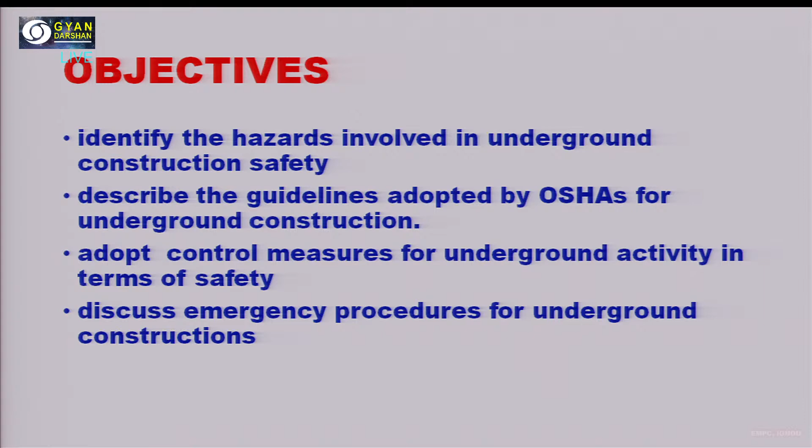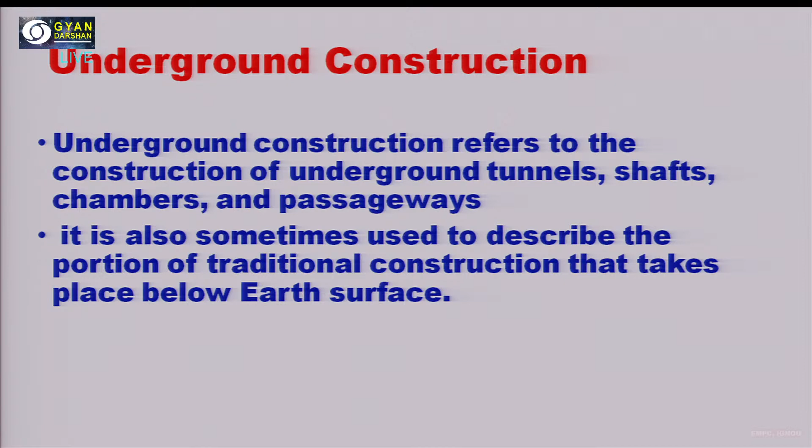So let us first understand what is underground construction or underground works. Underground construction refers to the construction of underground tunnels, shafts, chambers, and passageways. It also sometimes refers to the portion of traditional construction that takes place below earth's surface. Any construction activity or works going on under the surface is referred to as underground works or underground construction works.

Now let us look at some history of when underground works or underground construction works began. Human underground construction activities began with cave dwelling prehistoric people who wanted to expand their homes. This goes back to the prehistoric period when human beings were living in jungles and finding their dwellings, and the easiest dwelling they could find was in natural caves. These caves were small, so they wanted to expand them for their living, and started excavating and cutting them. So these were the first traces of underground activity in human history.

Then all ancient civilizations practiced some form of underground construction. Whatever civilizations existed throughout the world, you will find that some kind of underground construction work happened, with traces found like that.

One important branch of this, you can say as proof, is rock cut architecture. What is rock cut architecture? You might have read in history that in India and throughout the world there are many buildings and constructions which were carved out by cutting the parent rock. No building material was brought to that place; everything was created by cutting the existing rock. These people were doing this construction activity by cutting that rock and entering into it, so this was considered as underground work or underground construction.

And in early urban centers, underground spaces served as burial places. These were used as burial places and to provide protection against invaders. When invaders invaded any place, people created underground spaces for their safety to safeguard themselves from the invaders.

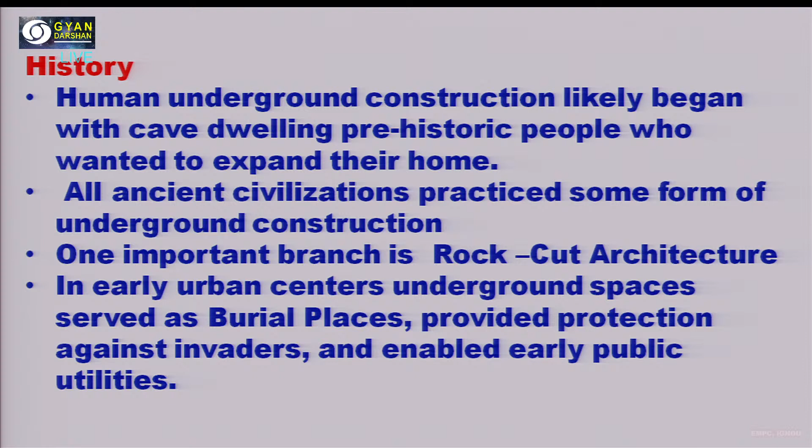Then it enabled early public utilities. Many services and public utilities were also built underground for this purpose. So these are some historic facts about underground works or underground construction.

Now, what happened later was that as urbanization increased, there was a need to find spaces which would not disturb the aesthetics of the existing place and also not make existing facilities congested. So it was thought to put public services or utilities underground, activities like laying cables and making sewerage systems. Many things started going underground, so with urbanization, this underground activity also increased.

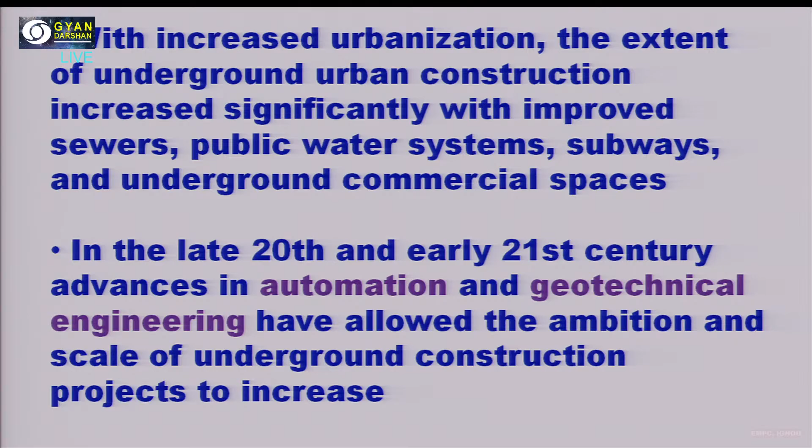Like sewers, public water supply systems, subways, underground commercial spaces. You find nowadays many underground commercial spaces, almost in every market. Then if you travel on the roads, you find many subways there. So these are the activities which increased with increased urbanization.

In the late 20th and early 21st century, advances in automation and geotechnical engineering have allowed the ambition and scale of underground construction projects to increase. There were challenges, problems, and risks involved in underground construction or underground works, but now with new facilities, technologies, and machineries, it has become easier and a bit safer in comparison to the past.

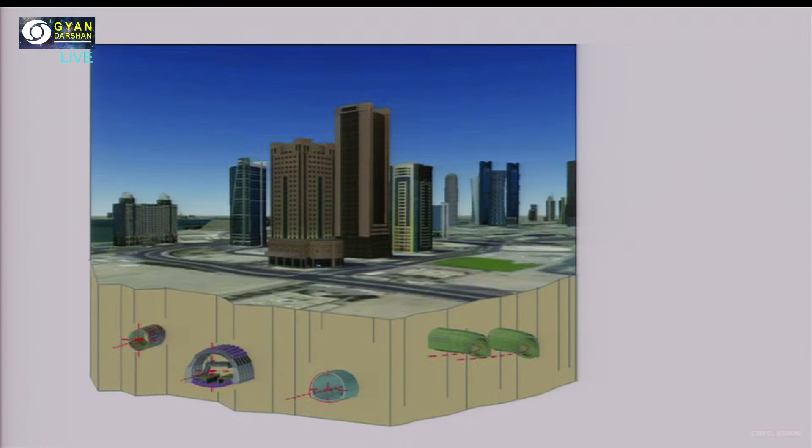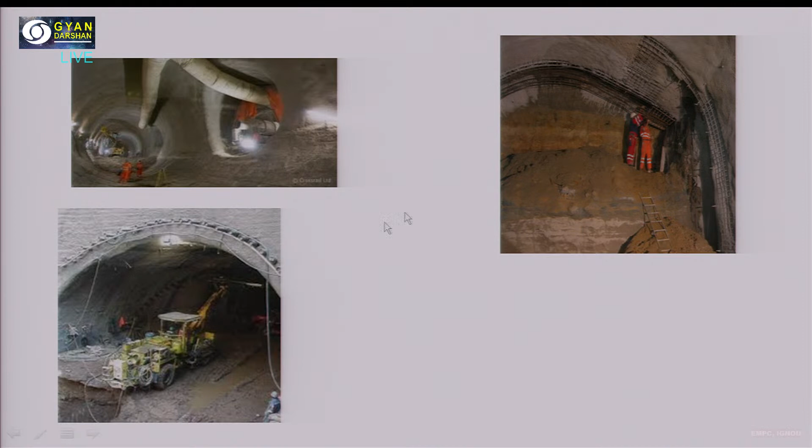These are some of the other graphics which show what type of things the engineers are doing under the earth, basically. You see the tunnels here; all three pictures are related to the tunneling work. This shows how these are done, but these pictures are also giving you a glimpse of the risk associated with these activities.

There are many risks associated with these activities, and two prominent risks are the problem of lighting and ventilation. When working underground, there is no natural light available. Second is ventilation, air is not available. So workers have to work in difficult situations, and these situations may be very risky for the health of the workers. From that point of view, the safety aspects come into the picture.

So this lecture is all about this: what are the risks associated with underground works, and what safety measures we can take to avoid any accident while working underground.

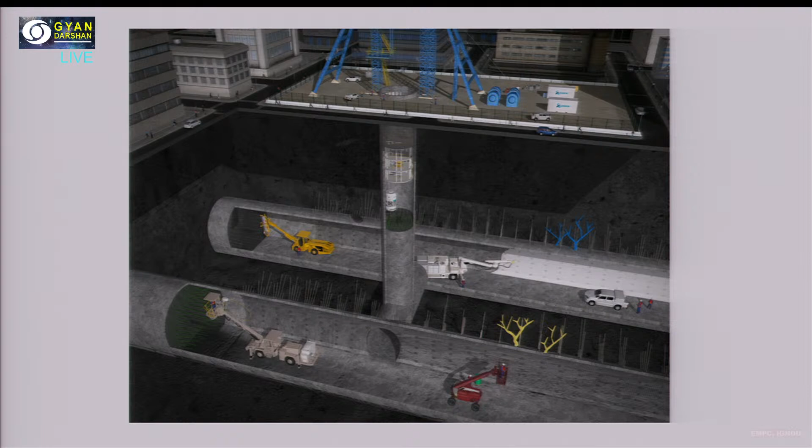You can imagine that these workers are working at a great depth, so there are many risks and hazards associated with this type of work.

So what are the challenges in underground construction? Underground construction has a number of unique risks, mind it, these are risks which are associated with this type of work specifically. In addition, there are challenges which are associated with traditional construction and mining also. So there are two types of things: risks associated with traditional construction and mining, and additional risks which are unique to this type of work.

Underground construction workers often work under reduced light conditions because there is no natural light available there; we have to make arrangements for lighting. Then these spaces are very dangerous. How are they dangerous? There may be a fall of material, a fall of loose sediments.

There may be some gas pockets there, which we often find. Then there may be an ingress of water, because if a shallow water table is there and we punch that water table, there may be an ingress of water. Water may flow into the space where the workers are working. So many things make this space a dangerous space.

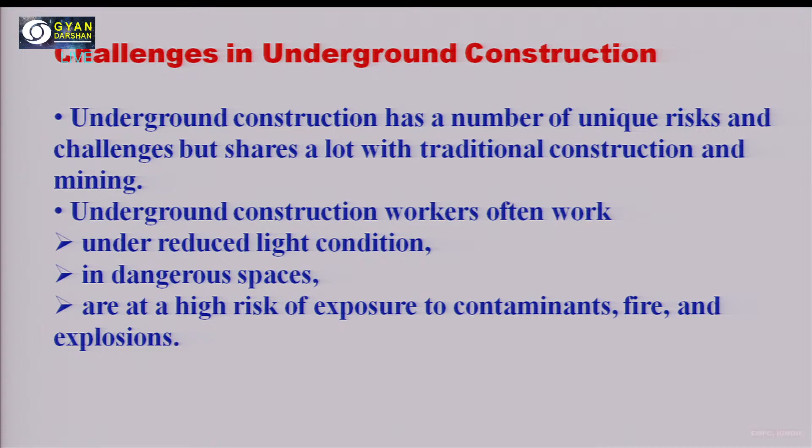There may be fire accidents also, because if some inflammable gases are there underground, and due to friction in the tools and the stones, a little spark can give rise to a great fire. So such types of risks are there. Then there may be explosions, because of these explosive gases and materials also. So these are the risks which are associated with such types of works.

Now, what are these risks? Let us see one by one. First, as I told you, fall or dislodgement of earth, rock or other materials.

When these workers are excavating or doing tunneling work or trenching, the loose materials, loose earth, rocks and other materials may fall or dislodge from their original position and hit the workers, or if the amount is large, that material can bury them. So these are the risks.

Then the workers working there are working at different levels, so these workers may fall from their workplace or workstation. There may also be a fall of materials, objects, machines, or tools. If a worker is at the lower ground level and another is working 5-6 feet above, and if accidentally some tool falls from his hand and lands on the head of the other worker, it may cause a major injury which can even lead to casualty. So such types of things are there.

Then, inrush of water into the excavation, as I told you just now, if some pipeline is going on and we accidentally hit and cut that pipeline - whether a water supply pipeline or a sewerage pipeline, or a natural water table at shallow depth - if this inrush of water happens into the excavation, these workers may be trapped there and there may be a big accident.

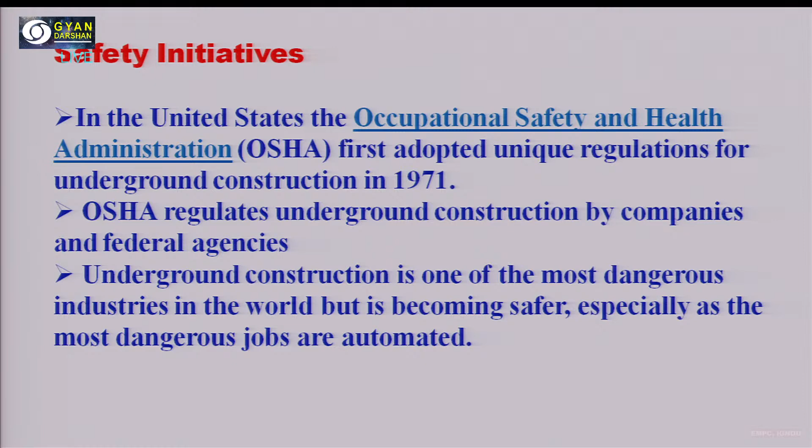In the United States, the Occupational Safety and Health Administration, OSHA, first adopted unique regulations for underground construction in 1971. OSHA regulates underground construction by companies and federal agencies. Underground construction is one of the most dangerous industries in the world, but now it is becoming safer, especially as the most dangerous jobs are now automated, meaning they are being done by machines and robots. So it has become comparatively safer than earlier.

So in the Indian scenario, what are the rules, regulations, provisions, guidelines basically? Here in India also government has developed Indian standard codes related to the safety of underground works. What are these codes? Here you see the different types of codes mentioned.

IS 4756 1978, safety code for tunneling work. Then IS 3764 1966, safety code for excavation work. Then IS 4081 1986, safety code for blasting and related dealing operations. Then IS 4138 1977, safety code for working on compressed air. Then IS 7293 1974, safety code for working with construction machinery.

Then another code with many parts, IS 5878, code of practice for tunneling and underground excavations. Part 2 section 1 deals with drilling and blasting for underground excavation for tunnels in rock. Part 2 section 2 is code of practice for construction of tunnels, dealing with ventilation, lighting, mucking and dewatering. Then IS 5878 part 1 is code of practice for construction of tunnels, giving guidelines regarding precision survey and setting out.

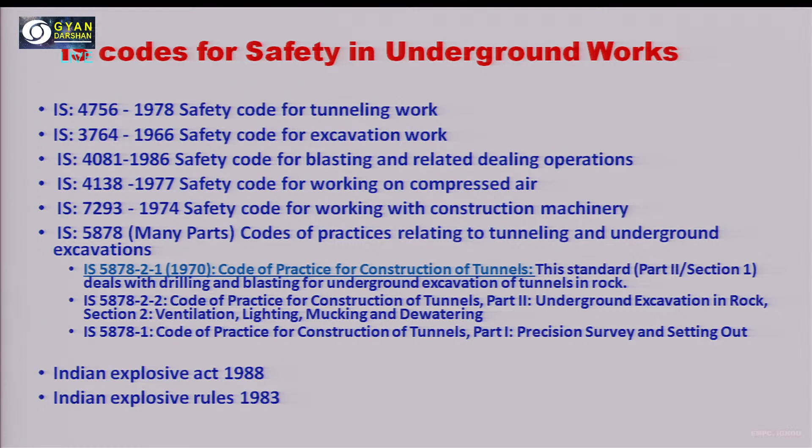Then another act and rules: Indian Explosive Act 1988, because during tunneling work explosives are used. This gives guidelines regarding explosive materials, how to deal with them and use them safely. Then Indian Explosive Rules 1983. So these are some of the guidelines for safe underground works. If followed, underground activities or works can be done safely and we can avoid many accidents.

Indian Railways also have developed guidelines for safety in tunnels during construction. They have published a report, RDSO 2011, GE:G-0016, which was published in 2012. It gives a detailed account for safe work during tunneling, how to do the work safely.

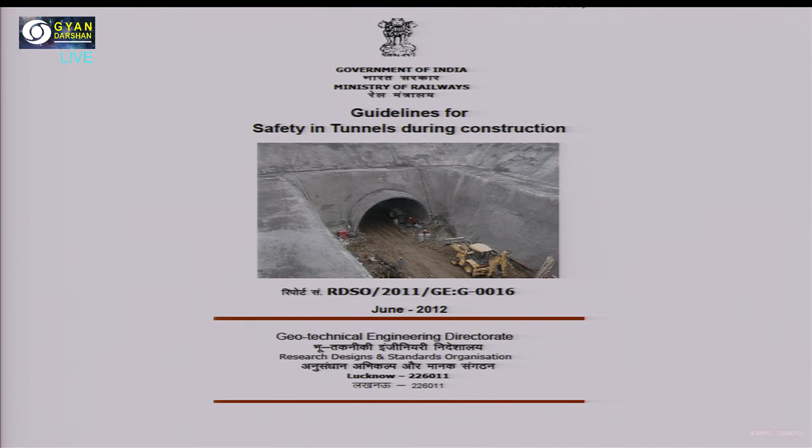Now let us look at the general safety provisions. If we follow these, we can avoid many accidents and the work will be done in a safe manner. Let us see one by one. Adequate safety measures should be taken while performing critical activities involved in any excavation, earthworks, underground works or tunnels.

These activities can be safely performed by following some basic safety measures such as: suitable shoring, sheeting, putting wire mesh, rock anchoring to guard against danger to workers from a fall or dislodgement of earth, rock or other material. We are avoiding two situations: fall of a worker or dislodgement of earth, rock or other material. Then, to guard workmen performing these critical activities against hazards arising from the fall of persons, materials or objects, or inrush of water into excavation, shaft, earthworks, underground works or tunnels.

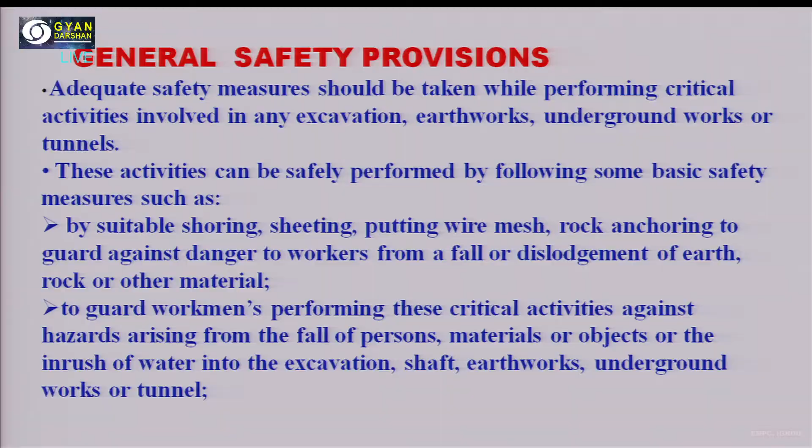So there is a long list of these safety provisions or guidelines. If followed, we can avoid many accidents which generally happen in underground works or underground constructions. We will continue our discussion in the next lecture. Till then, go through the text that you have with you, and we will discuss these things in the next lecture. Thank you.